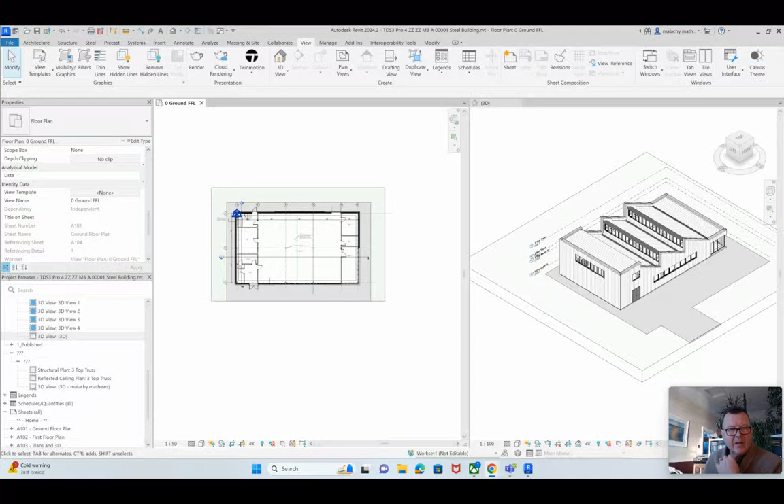Hi students. I see Pierce has posted on your Engage community the locations where he wants you to do the 1:5 details, and he refers to call out details from the 1:20s. I'm going to show you how to organize that on our model here.

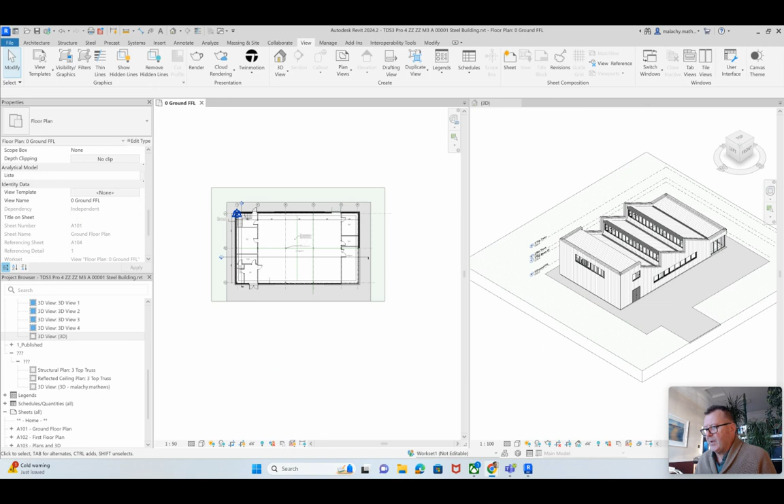Starting off with the 1:20 wall sections, we're going to need a wall section through here, and we're going to need one over here as well. I make a distinct difference between building sections and wall sections. You can see we've got a couple of wall sections in here already, so they go right through from one end of the building to the other.

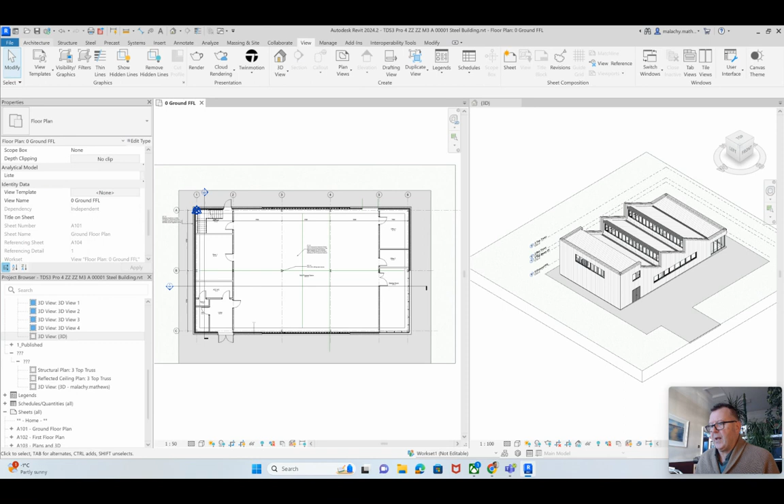So creating wall sections, go up into your plan here, and let's hit the section tool. Now hit the drop-down box here, and you'll see on your properties you've got a choice between building section and wall section. We're going to purposefully pick wall section, and I'm going to drop in my first wall section here.

This is the view box, so I'm going to drag it right out there so I can see what's happening over there. We're going to do that again for the second wall section, and it's going to go through that grid line there because I wanted to come up through the vertical section and the north light glazing.

Again, I'm going to pull that right through to there, and we're going to do that one more time. I'm going to take it in around here somewhere, and pull that right through there as well.

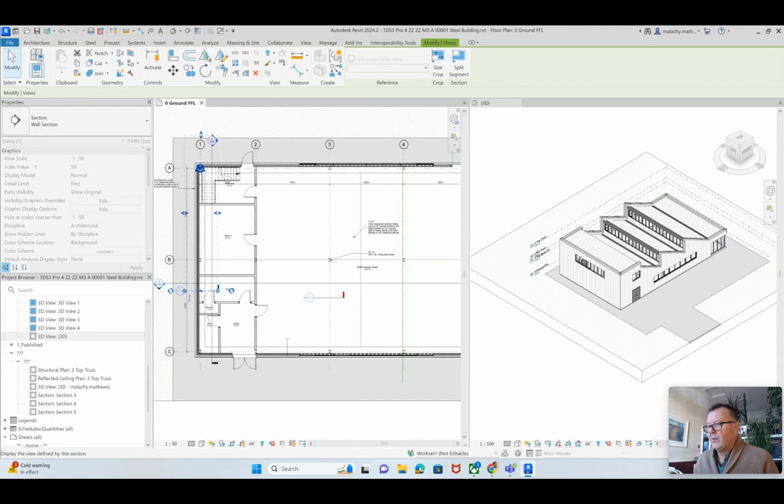Now, if you come over to the project browser here, you'll see that under the question marks I've got these sections here.

So the first thing I'm going to do is rename these. This is going to be called wall section 01. Second, we'll do this one - rename that to wall section 02. And rename this one section 03.

Now I'm going to place these - take them out of the question marks here and place them into this subcategory. The way I do that is to highlight each one, go up to properties, scroll down to the bottom where you've got your view category, which is WIP, and your view subcategory, which is wall sections, and in they go. Now you know where to find these.

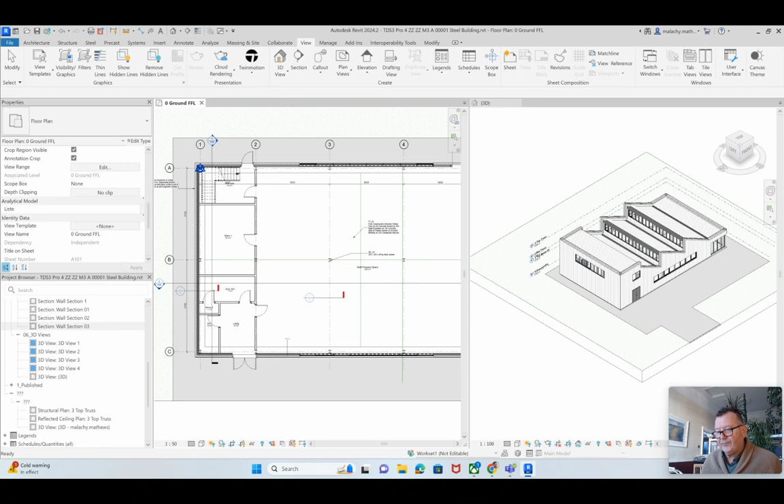All right, so let's open these up - wall sections like so - and we're going to change this to a scale of 1:20 straight away.

I'm going to just tailor these a little bit with the crop box like so. Let's do wall section 02 - sorry, that's not it, we want wall section 02 - and again 1:20. This up like so, and down like so. That's fine.

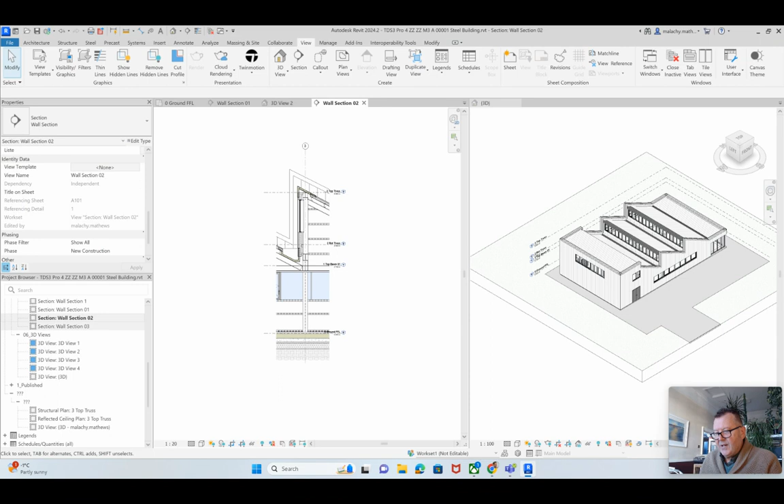I'm going to switch off the crop box there. And the final one, wall section 3, and again 1:20. Like so, and we'll turn off the crop box there.

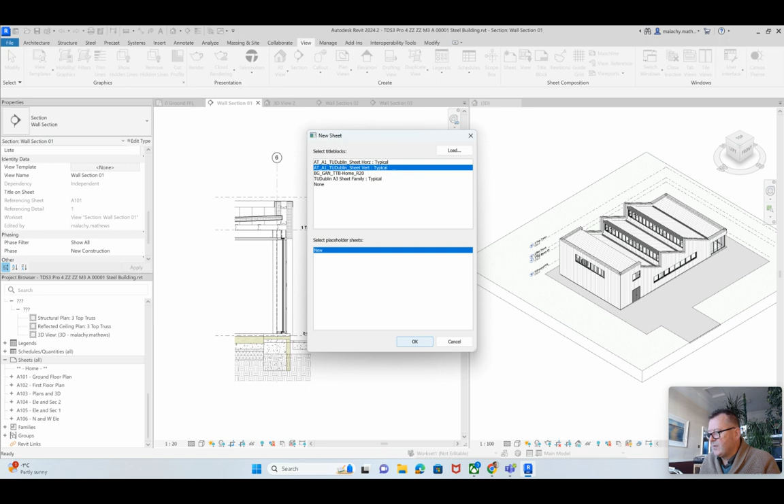Now I'm going to organize these on a sheet straight away. So I'm going up to my sheets and I'll do a new sheet. I think these will fit on the vertical, so I'm going to try the vertical here. Pick that, turn off the grid.

All right, now let's drag these views across - there's section 1 like so, section 2 like so, and section 3 like so. Perfect. Sections 1, 2, and 3.

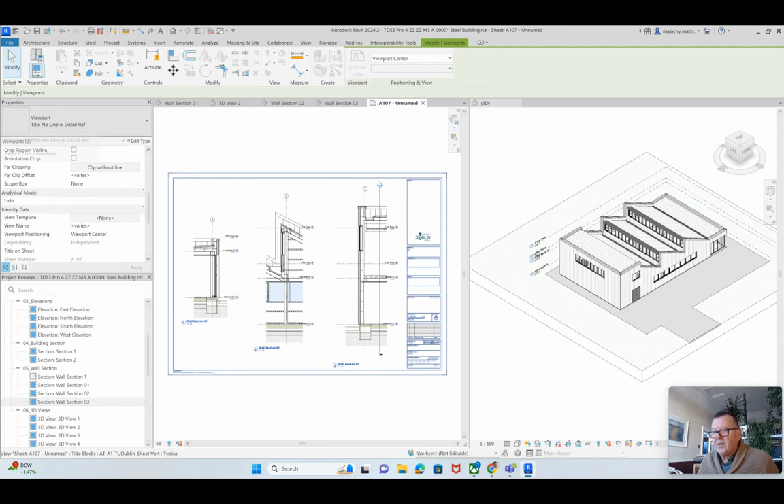Pick each one of these here, and I'll change that to - I prefer that title with no line, with detail reference. The detail reference is important.

All right, let's take a look at that sheet. Let's just go back to Pierce's diagram here. So he's got 1, 2, 3, 4, and 5. All right, so let's do that now.

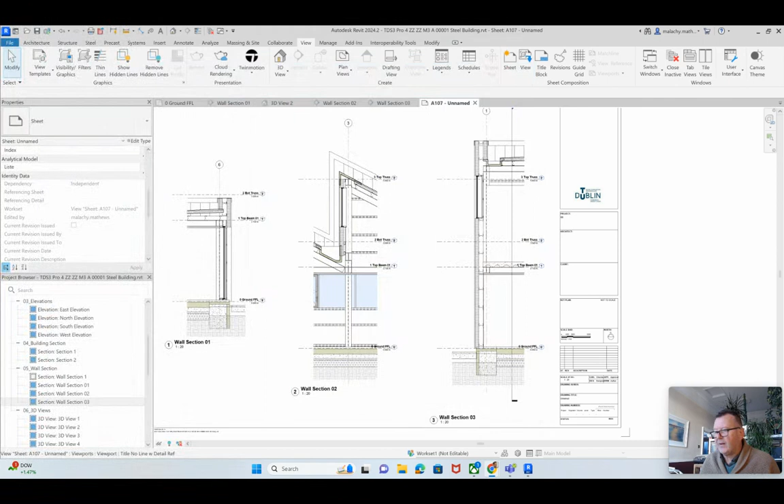So from your wall sections, here's wall section 1, and that is over the other side there. So we're going to do our callouts from these rectangles, and I'd say Pierce is interested here in that threshold detail. So what happens at this point here?

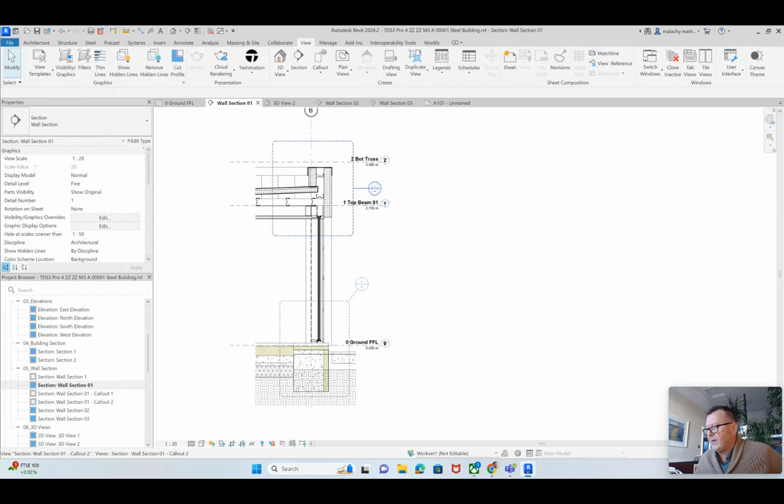Okay, and then we're going to do - he's not done the capping, so I'm going to include that in this one here as well. I think that capping will be an interesting detail to explore. Okay, so that's that one. And you can see here, the callouts coming in here are associated with section 1.

So we're going into section 2 now, and we're going to do our callouts here. And this is the one he's interested in - your gutter arrangement there, and then the capping up on top here as well. So let's do our callout there.

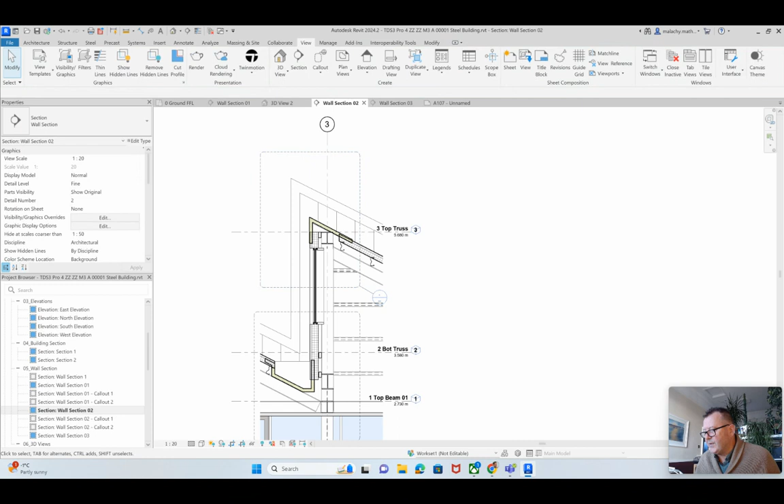Okay, and I'll just drag that. So this is the tag for the callout, and they're very important in terms of coordinating information. And then we'll do our section 3 here - we've done the capping already, so I'm going to do this one and this one down here.

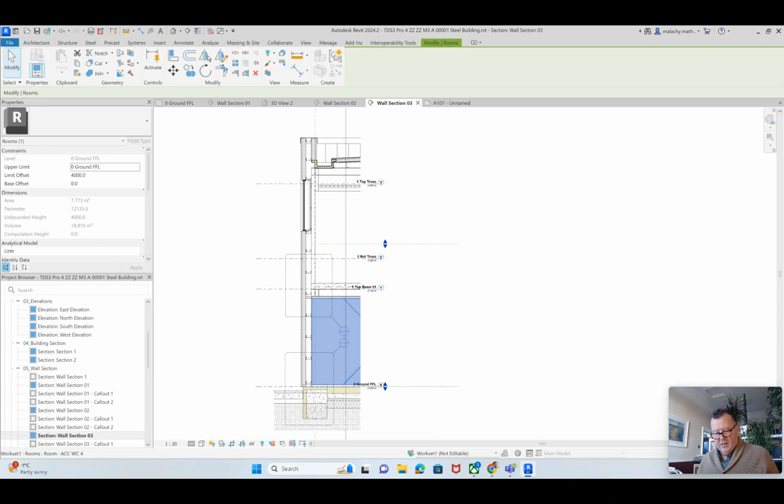Now, if you look at our project browser now, you'll see that we've got our wall sections and our callouts. But I'm going to move the callouts into another subcategory here, and I don't think I've got a subcategory yet, which is good - so I'm going to show you how to make this.

All right, so what we're going to do is select that one, and I'm going to make a new one. So this is going to be 07 underscore callout details - now let's do that underscore there. Okay, apply, and that's that one.

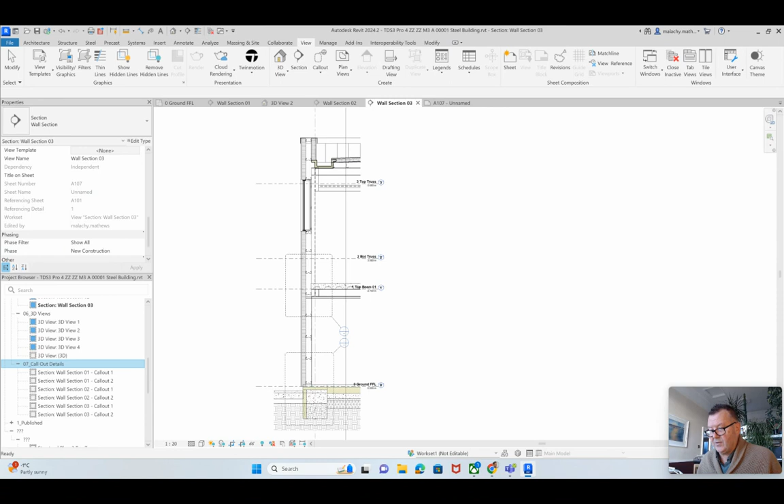So I'll pick this one, this one, this one, this one, this one. I'm going to move them all into that callout details folder. Okay, so there's our wall sections here, and here's our callout details there. Now, if you can get that far, that's great - that's your wall sections and your callouts organized in the project browser.

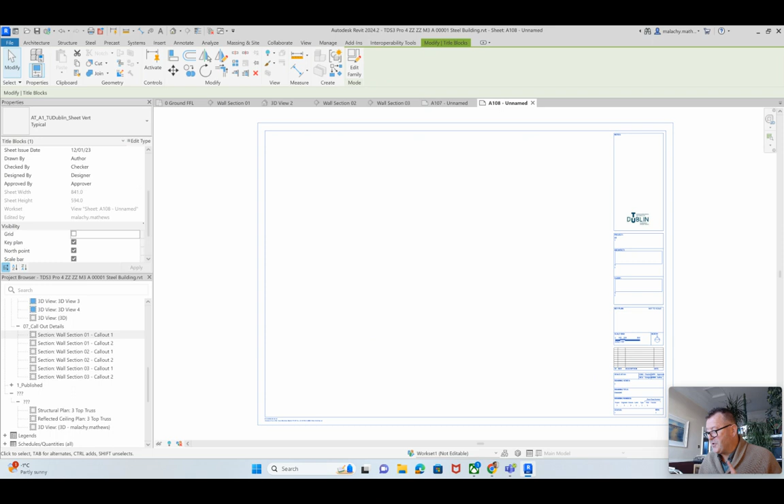And perhaps the last thing for this particular video is I'm going to do a new sheet. I'll do the vert - I'm going to do the vert again, I think this time. Again, select, turn off the grid here. Now let's drag our callouts in. You might be doing a couple of sheets of these if these are at 1:5. All right, so let's just activate that view, at 1:5.

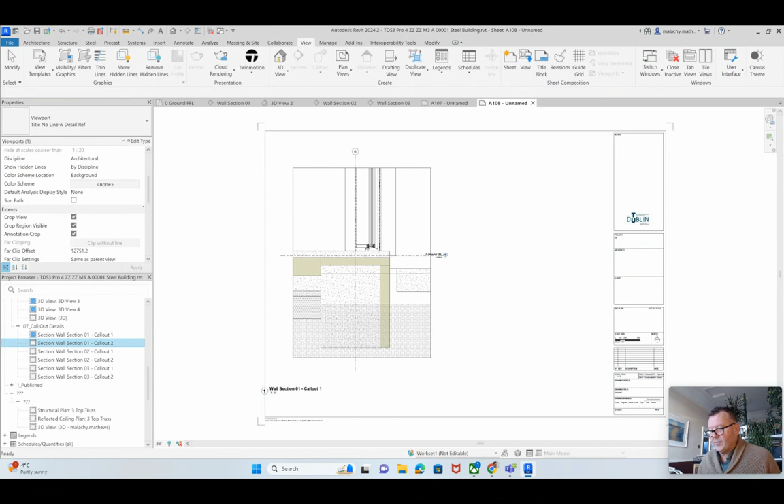These are very big. Deactivate the view. Okay, so we might get 2 on here if we're doing well. Okay, and let's do this one. So it would be nice if we could get 2 per sheet. Activate the view - is that to 1:5?

Deactivate the view, and let's get this organized here. Yeah, so that's not bad there now. Move that one across - we can do a little bit of editing with each of those. And so, all right, now I'm just going to activate that view.

Turn off the crop box and deactivate. And then I'll do the same here - activate the view, turn off that crop box. The crop box doesn't plot, but it visually annoys me, so I like to have it turned off there.

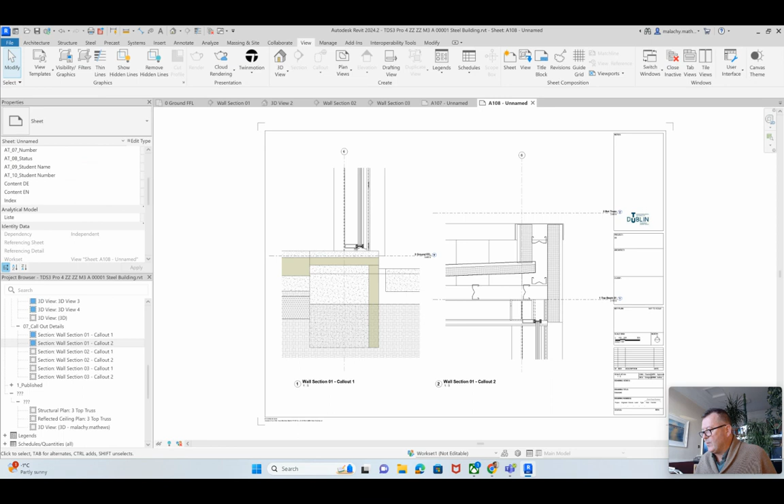Now, so there's your 2 details from wall section 1. And so you're going to set up 2 more sheets with the other callouts on those as well. And I will show you how we're going to go about tackling the detail on these in another video.